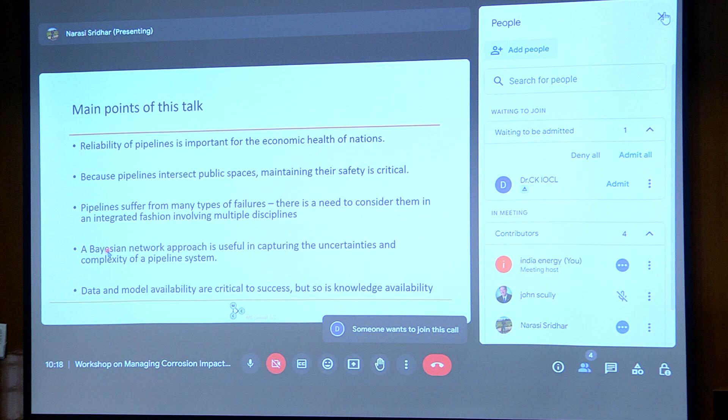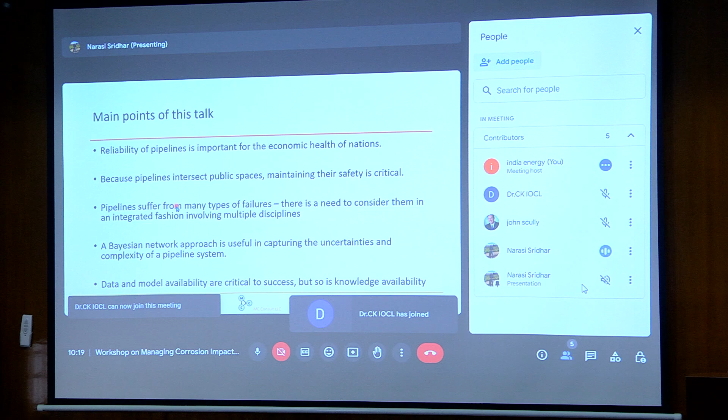So the main points of my talk will be that reliability of pipelines is important for the economy and the health of our nations. Pipelines intersect public spaces, so maintaining their safety is extremely critical. And pipelines suffer many types of failures. I'll share some of them with you. And so there is a need to consider them in an integrated fashion. That means involve multiple disciplines. And one of the things I'm going to talk a little bit about is the Bayesian network approach. I hopefully convince you that that's a good way to integrate diverse disciplines and ways of thinking.

And the last point is that it's not enough that we have data and models, but we need to have a way to access our knowledge. So we have to go beyond the current AI and machine learning techniques to really actually use the knowledge of people that we have gained over the last many decades.

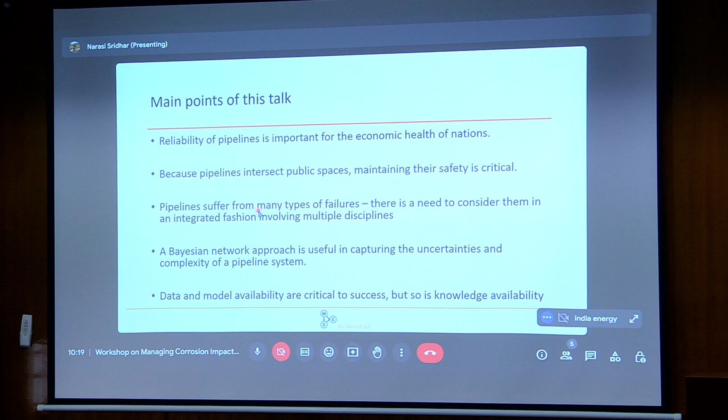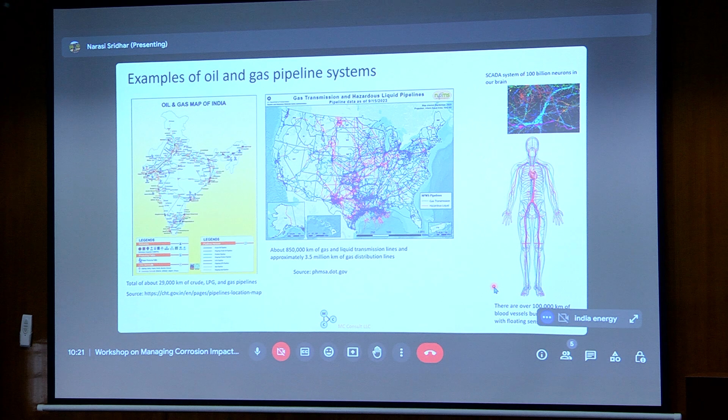Now, we may be impressed by these numbers, but one thing we need to think about is our human body has 100,000 kilometers of pipelines, operated by one compressor station, but managed by a supervisory control and data acquisition system, similar to pipelines. That's called our brain. That's got about 100 billion neurons. The number of neurons in each of our brains exceeds the number of stars in the Milky Way. And if you look at all the connections between all the neurons, it exceeds the number of known particles in the universe.

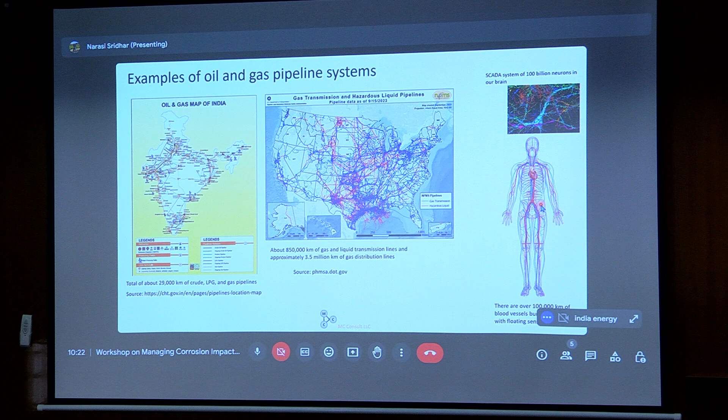So we have an impressive computational system and a system that monitors our internal pipelines every day of our lives. Nature has done that over 4 billion years of evolution. And that's really our ultimate goal: if we can make our pipelines monitored the way our human body monitors its pipelines, we have achieved something. But we are far from that.

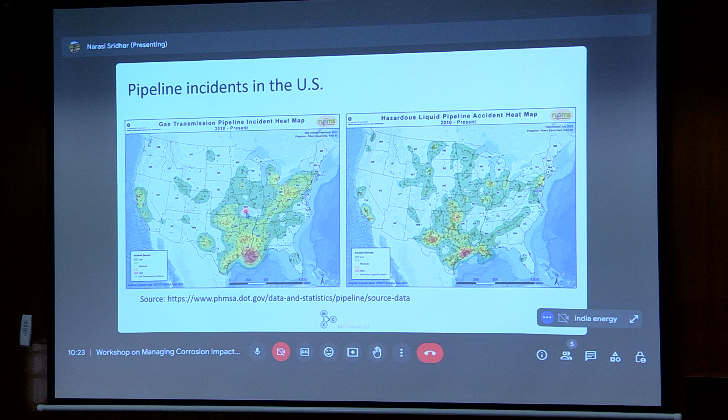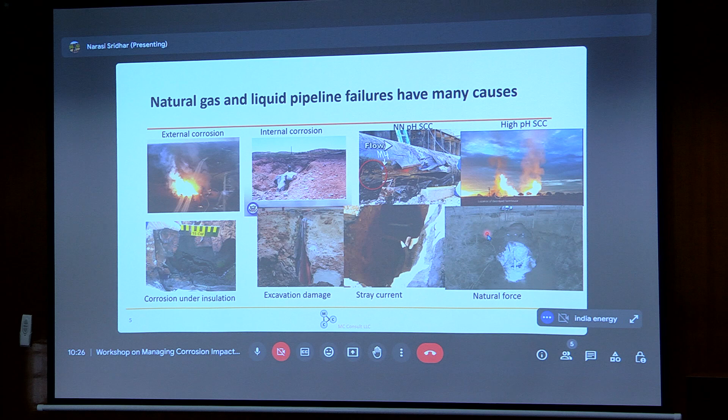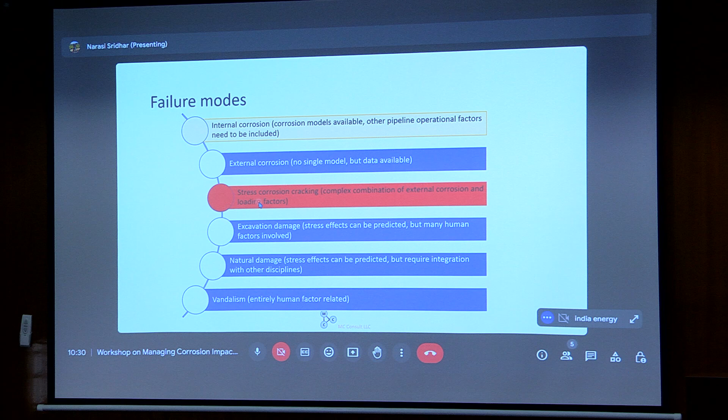And the reason we miss these failures is because we fail to combine our knowledge and identify ways things could fail in new ways. And this is, in a way, what I'm going to talk a little bit about today. So I'm going to show two examples of internal corrosion and SCC, and I'm going to go through it pretty fast in the interest of time.

So internal corrosion occurs because whenever water contacts steel, you have potential for corrosion, but water alone doesn't cause corrosion. You need impurities in the natural gas in the form of CO2 and H2S and oxygen that influence the corrosion. And you also have microbiological colonies. And of course, you can inhibit corrosion by adding organic inhibitors.

And of course, sometimes you get sand from production, so you get these solid particles that cause erosion. And then if you add solvents like ethanol or supercritical CO2, they can affect localized corrosion as well because they solubilize other species. So there is a bunch of factors that affect internal corrosion.

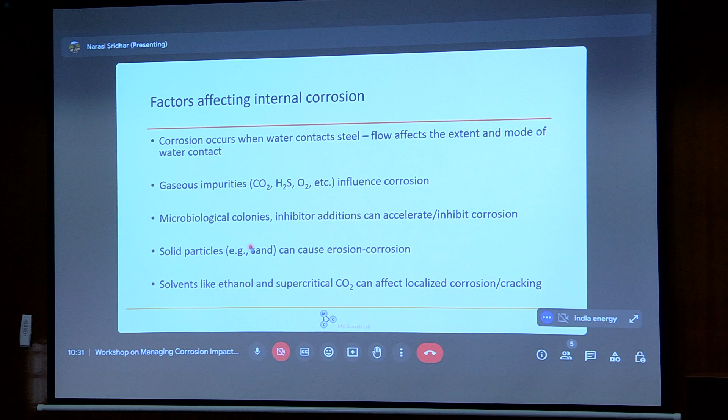In addition to that, there is a flow that occurs in the pipelines, and these cause various flow regimes. The most of interest for corrosion is annular flow, because you have water, which is the gray film that constantly contacts a pipeline, and the gas flows through in the annular space. And so this would be a greater concern for corrosion.

But you also have slug flow, where you have slugs of gas that flows through, so you have intermittent contact. And these flow regimes differ whether the pipelines are vertical or horizontal or somewhere in between. And one way to think about it is probabilistically.

So here, the probability of various flow regimes is plotted as color codes in terms of superficial velocity of gas, that is equivalent velocity as if the gas is completely occupying the pipeline, compared to the superficial velocity of liquid, which is the equivalent velocity of liquid if it occupies the total cross-section of the pipeline.

Of course, in a gas-liquid mixture, there is a proportion of these two, so they occupy a partial cross-section of the pipeline. And you can see that annular flow becomes predominant when the pipeline is facing vertically down. When the pipeline is facing vertically up, there are some regions where annular flow becomes important.

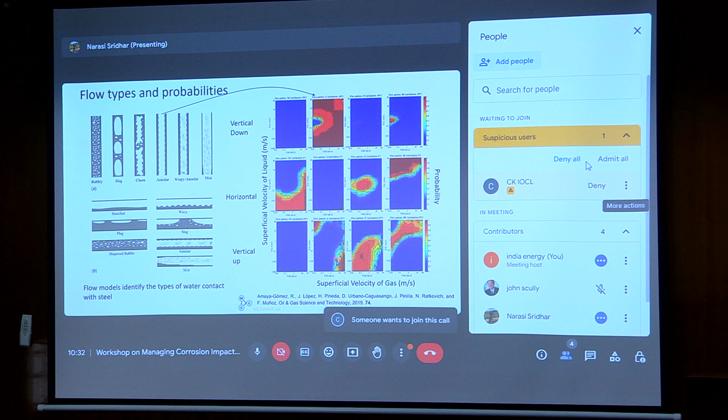So flow model has many uncertainties, and we have to capture these uncertainties. Corrosion models also have uncertainties, and we have to find a way to capture them. There are many mechanistic models, and in fact, if you look at the NACE standard or AMPP standard, the Appendix B lists a whole slew of models. Most of them are proprietary. So the question is, how do you tap into these?

Fortunately, I happen to have access to this model, OLI system. And what I do is I exercise this model against a whole host of variables and develop a parametric expression. And that parametric expression then can be used in a Monte Carlo simulation to develop a probability distribution function. And other people have done it using other models. For example, Ohio University has a model that can be used as well.

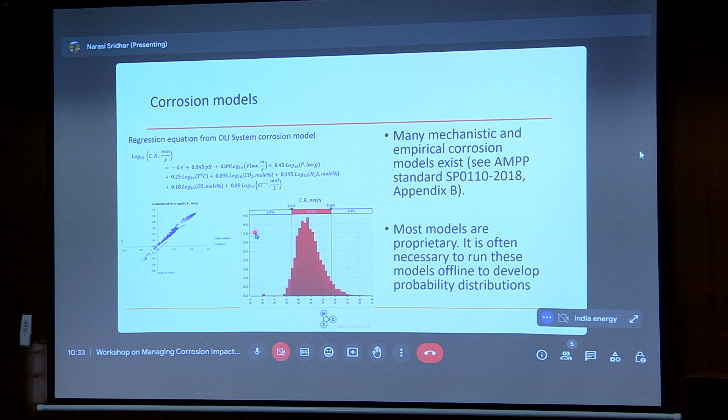So the limitation of all these things is it doesn't capture all the uncertainties. It doesn't capture all the other things that are going on in a pipeline. So how do you integrate all these things? So to do that, a Bayesian network is a good way, and I'm giving you a very simple example here.

So if you have a CO2 partial pressure, but you don't know what the value is, you assign a coin toss: 50% it's 0.1 to 0.5 atmospheres, and 50% it's 0.5 to 1 atmosphere. And you don't know the temperature, and again, you assign a probability, and it gives you a probability distribution. And here I've used the well-known de Waard-Milliams equation that equates corrosion rate to partial pressure of CO2 and temperature.

Now, the advantage of a Bayesian network is, what if you know the corrosion rate through inspection? So now you know the corrosion rate, and it says, well, most likely your partial pressure of CO2 is high, and there is also a good likelihood that the temperature is high as well. So basically, a Bayesian network allows you to update your input factors based on your knowledge, which is based on the data, which is inspection data.

But what is embedded here is the research knowledge that was gained out of laboratory experiments, not out of just data correlations. So here we can do the same thing using multiple other variables, oxygen and H2S, and we use the Ohio University model, run it millions of times to get a big probability distribution table, and that's incorporated in this probability calculation.

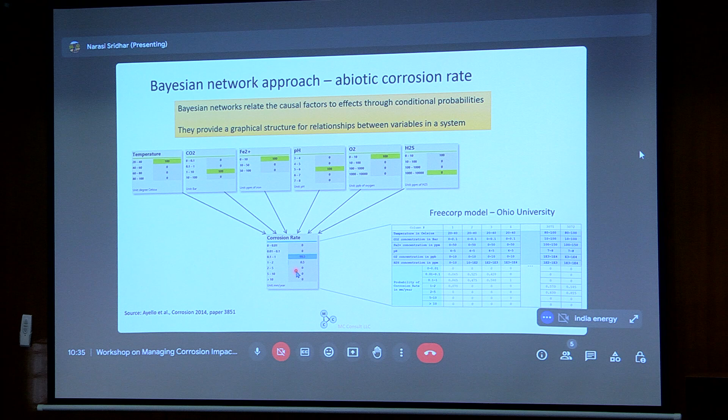So the basic idea is that the Bayesian network provides you a graphical representation of the causal knowledge that we have developed over the years through much research done in this field. But of course, the pipeline is much more complicated. What I showed you is just one box.

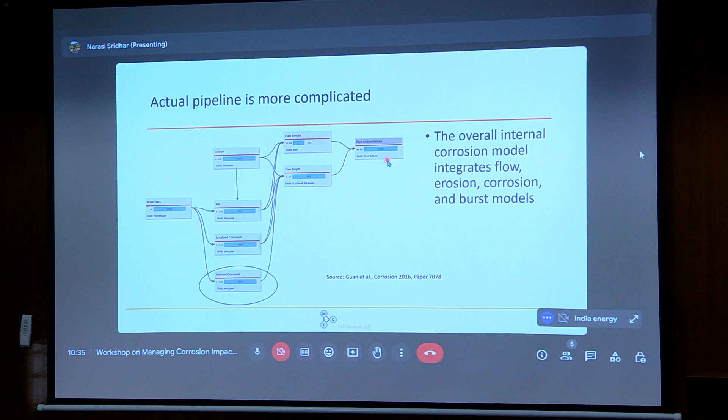You have the flow box, which tells you when the water wetting is going to happen. You have the erosion box, you have the microbiological corrosion, and so on and so forth. And eventually, you're interested in ultimate failure of the pipe, so there is a fracture mechanics component involved in it too. So we can go through these models, and what we have to ultimately do is ask how valid is this model, and we can test it.

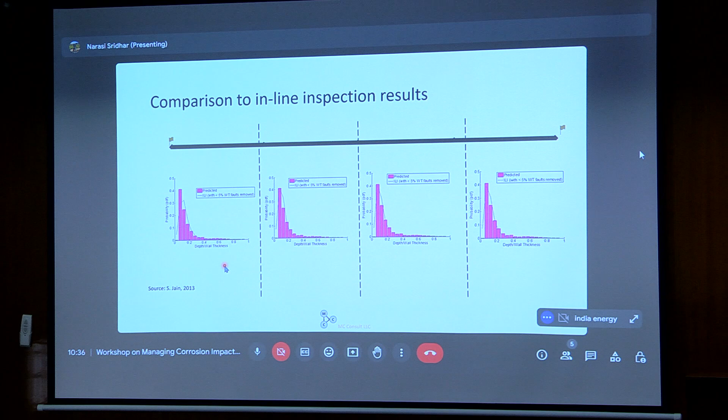So here is a pipeline in China where we tested the model, and the pink bars are the predicted probability distribution, and the line is the actual inspection data, and there is reasonable agreement between them. So the idea with these kinds of models is, as you integrate these diverse tools, you have to constantly validate against existing field data.

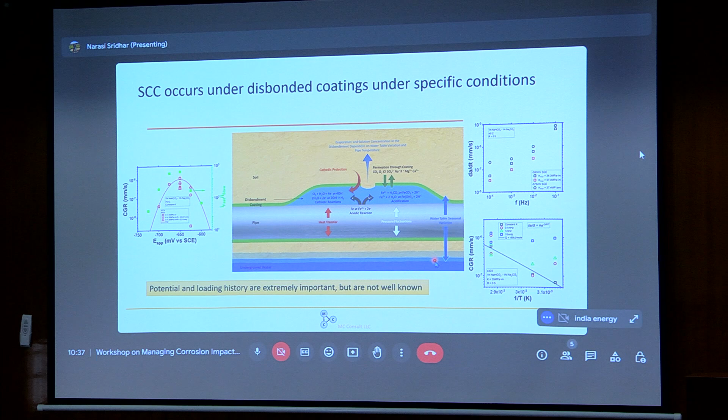So what is really important in this slide is that to model the stress corrosion cracking of the pipeline, you need to know the potential and loading history, as well as all the external soil conditions, the type of coating that is present, and the water table movement that happens seasonally. So this requires putting together an enormous range of disciplines to get at this problem. And that's what we've kind of done.

So we have looked at the coating SCC model in chunks. There is a coating disbondment module. There is a module that predicts the surface potential using reactive transport modeling. There is a model that predicts the chemistry, and there are all these crack growth rate models. And the reason SCC has a low probability is because it's a Goldilocks syndrome, as they call it: all these things have to come just the wrong way for a pipeline to suffer from SCC. That's why it has a low probability, but a high consequence.

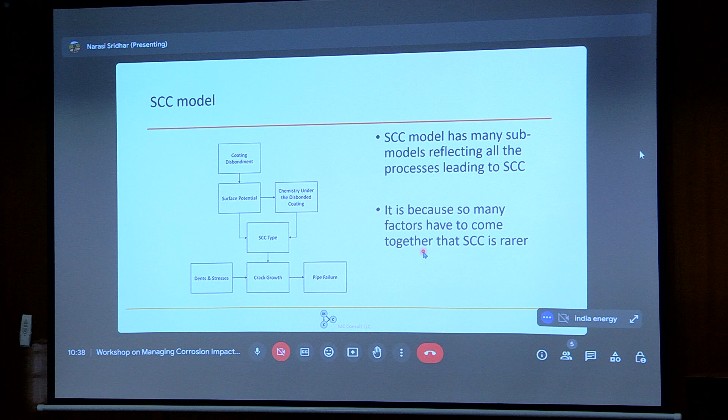So we go through this model, and we can model this. For example, coating disbondment occurs because soil shears the coating, and that occurs because you have rainfall and you have a low slope that moves the soil. But if you have a lot of vegetation, that prevents the soil from slipping. So you have to capture all these things that the soil biologists and geologists study.

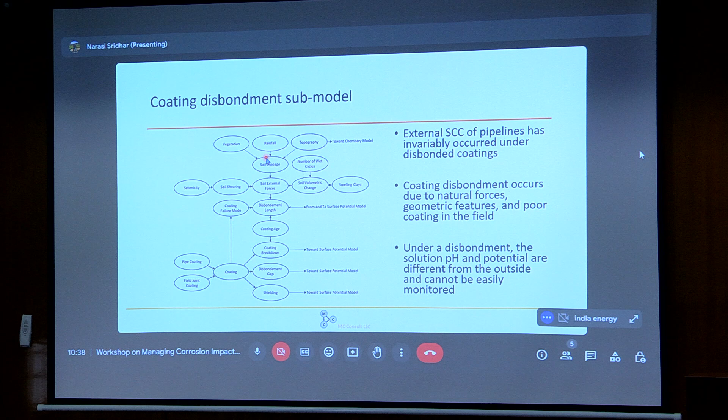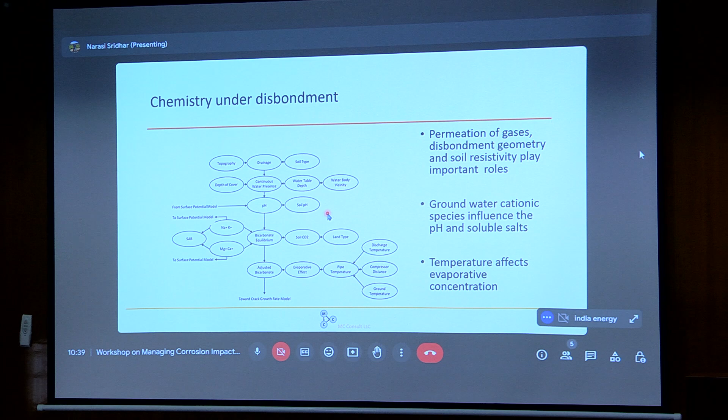And similarly, you have this potential distribution. So we have done a tremendous amount of modeling to calculate what happens inside the coating disbondment, and that's a function of soil chemistry. So we have to capture this as well. And finally, we have to capture the chemistry inside the disbondment, and then predict the pH, since the type of SCC depends on the pH. There are two forms of SCC, high pH SCC and near-neutral, and then that depends on the potential and so on. So finally, this also can be validated.

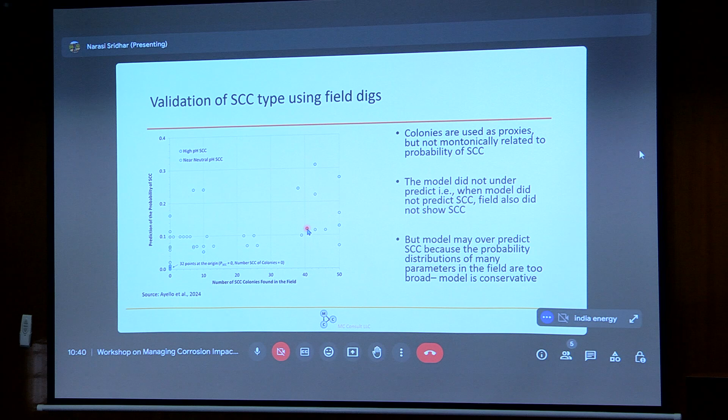So here is just a brief slide of the validation. What we did was compare the number of SCC colonies found in the field versus predicted probability. And you can see there are 32 points in the field that showed no SCC, and the model predicted that there will be no SCC. The model did predict there will be SCC when there was no SCC, which is okay. It's a bit of an over-conservative approach. But wherever there was SCC in the field, the model was able to predict the right type of SCC. So that gives us a comfortable feeling that we have captured all these diverse sources of knowledge and disciplines in modeling this complex problem.

And then we can also predict the crack growth rate to match the observed crack growth rate. So to really summarize this complex topic, what I really want to communicate to you is that pipeline is sort of an example of corrosion that involves many complicating factors that come together. And we have done a lot of research.

There was a question about how AI and machine learning approaches can be used. But my philosophy is that a lot of the AI and machine learning approaches are, to me, intellectually lazy. We have a tremendous amount of research and knowledge that we have acquired, and we need to assemble that in a careful way and develop a better way of predicting these events. I believe that Bayesian network is a good approach because it provides a lot of causal connections.

But one of the problems with Bayesian network is communicating that to an organization that has multiple layers, from top-level managers to a very detailed level technical person. So one of the ways that DNV, for example, has been doing, I'm not an advertisement for Microsoft, but we use Surface mainly because a lot of our models are already PC-based, so it was easy to assemble. But the idea was we could put the Bayesian network along a map of a pipeline, so we can point anywhere along the pipeline. It brings up the Bayesian network.